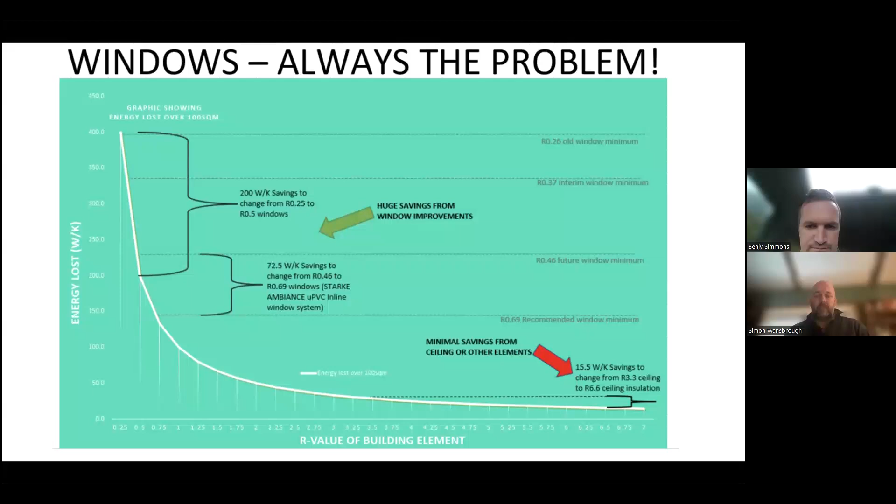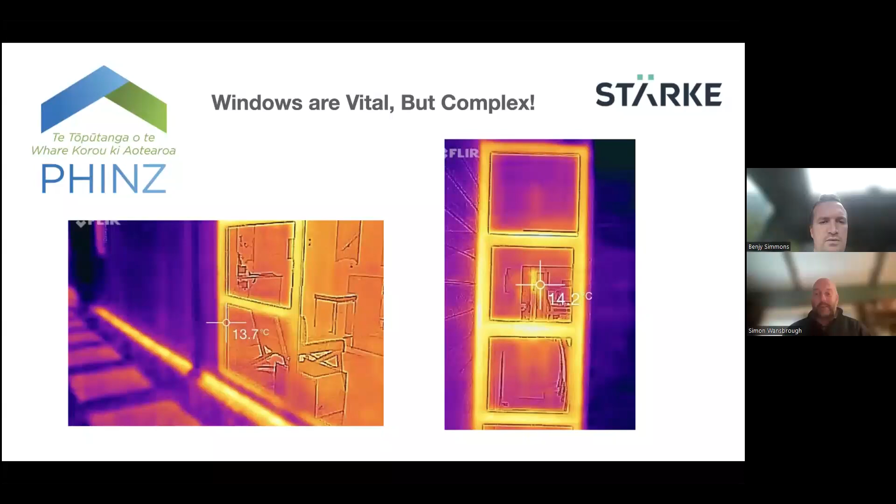And completely aside from what we're talking about, if you have a look at that left-hand photo, the bright orange line along the bottom, that's an uninsulated concrete slab. So yeah, not good. Wow.

So some of the things we're going to be talking about is how we can make windows better. So there's a few things there we're going to talk about: different types of windows, different types of glass, double glazing versus triple glazing, and also recessing the frames into the insulation.

So here, Benjy has a slide just looking at different window frame materials. Benjy? Yeah, and I've only just got smiley faces because a lot of the devil's in the detail, but globally, those three, thermal aluminium, UPVC, and engineered timber, they're the three that are generally compared. This slide used to have a cold aluminium column as well, but I figured I could delete that for this particular audience. None of this is fixed in stone.

So there we've got thermal performance. Well, thermal alley is medium, UPVC's better, engineered timber's best. That can vary depending on the exact product, but that's a rule of thumb. And certainly the cost plays a big factor too. You could buy thermally broken aluminium windows that were the best in the world that may outperform the others, but they might cost 4 or 5 times more.

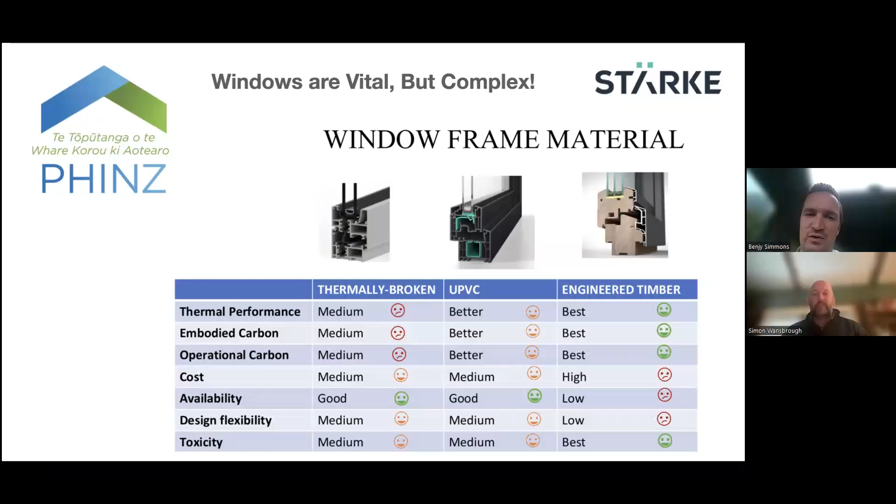I think the thing to note with the UPVC is that there's different grades, different profiles, which alters the performance. So just because it is PVC doesn't mean that it's necessarily going to perform really well. You can get some that have a lot fewer chambers or a lot more steel, and therefore they're not going to perform as well as some of the others. Aluminium's certainly in the same boat. You could buy a thermally broken system from a local Kiwi manufacturer that's incredibly low performance, or you could import one that was fantastic.

And this slide is talking to that exactly. So here on the left, you can see more of a New Zealand style thermally broken suite with a little green thermal break there that you can see. And then you can compare that on the right to something more like what Starke will do, or some other manufacturers in New Zealand. Weather Shield does a very similar one to that, and you can just see the difference there. Whereas on the right-hand side, the black section is the thermal break, so it's huge compared to the little one which is more of a New Zealand style on the left there.

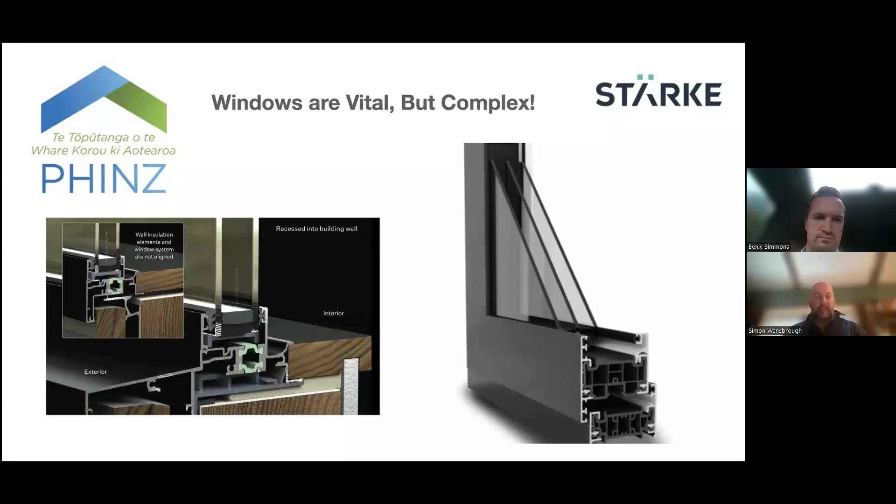Just out of interest, that left-hand photo is a photo from the APL Centrafix system, which helps to recess that thermal break in line with the insulation, which definitely does make a difference. Righto, so now we get more into how we install the windows to make sure that they perform as well as they can. So back to you, Benjy.

Yeah, it was an interesting one, and Jason touched on this in the last webinar for anyone who was there. Sorry, just before I get into that, obviously hanging the window frame out into the cavity like E2/AS1 is not going to work. You've got a huge thermal bridge there, and your insulation layers are misaligned. So to get that out of the way, we understand that the very best position is dead central on the wall, or at least central to your insulation layer.

What we found is that makes the flashings and the install quite a bit more complicated, or let's say bespoke. If the window is in the exact middle of the wall, or back 50 mil from the front face, then you get a bit of variation in that dimension. So sometimes it's back 50 mil and sometimes it's back 30 and sometimes it might be back 70, which means that all your flashings out from the window to over the claddings are all customized on site, and there's just a bit of complexity there, and that adds a bit of cost and a range of things.

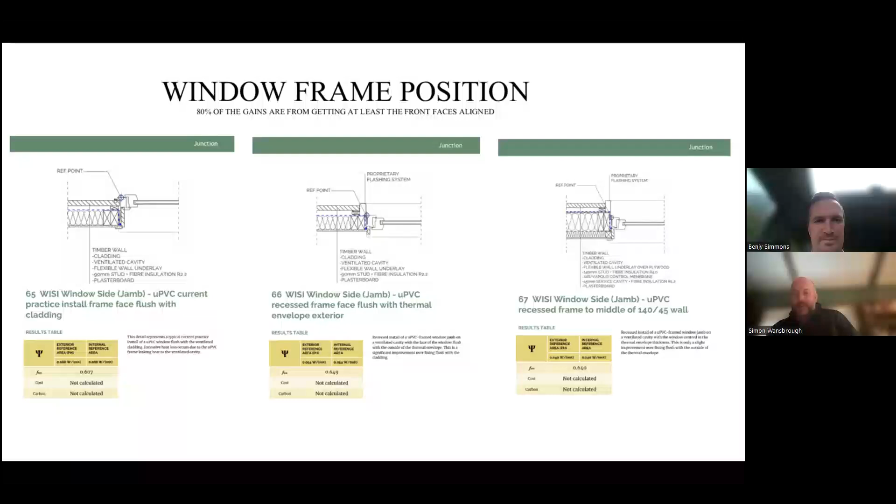I might have to say something controversial, Simon, and that'll get everyone piling in. Please do. It's the next one on air seal. Yeah. Here we go. The air seal. Should it be at the front or the back or both?

Yeah, surely there'll be some opinions on this, but obviously our default is a rear air seal. That's kind of in the code, and that gets us started. Now, what we know is that the air seal is actually the most critical element of the water tightness, because if it's airtight, then there's no air moving through the system, and when air moves through the system, it brings water with it. So as soon as it's airtight, you go a long way towards securing your water tightness as well.

So we have the air seal on the rear, and then of course a lot of people would want an air seal at the front as well, so you've got kind of two layers of air tightness, which is perfectly reasonable in a passive house situation. So then the debate normally rages around the sill at the front. So you can see our detail here has a little 5mm jog, which means that it's kind of open to air movement at the front.

The point in that is not to be open to air movement. It's not a standard drainage path, but it's for any potential water that ended up there anyhow underneath the window to be able to dry or drain out the front and ultimately get back to a dry state. Now, some people would say, no, you're better to completely seal, head, jamb and sill, front and back. Don't let any water get in there at all. But it just poses that risk: what happens if the window fails somehow and leaks down into that cavity? Then it's totally sealed and it can never dry, which is also not good.

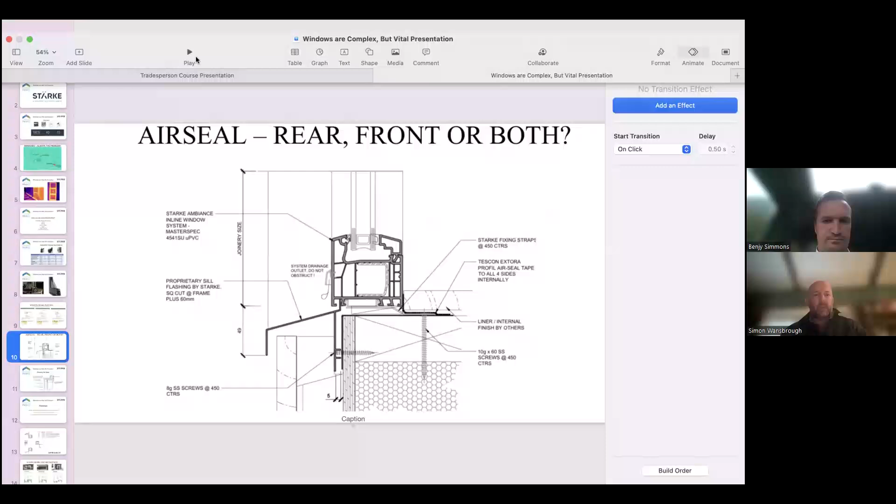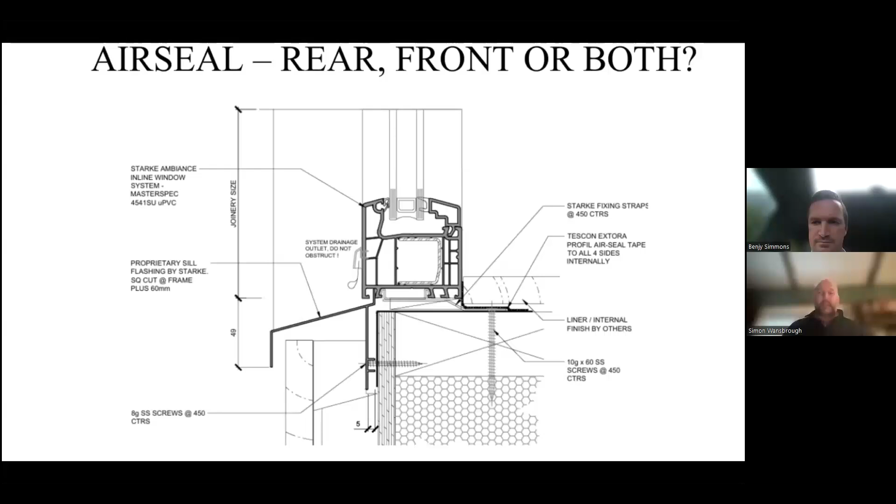I'm just trying to figure out why I can't see the chat box. I've got a little button down in the middle of the screen at the bottom that says chat. Yeah, but when I'm sharing, I can't see any of that. Oh, I see. Yeah. Anyway, but you can see it, so that's all good, Benjy. You can keep an eye on those. That'd be great. Yep.

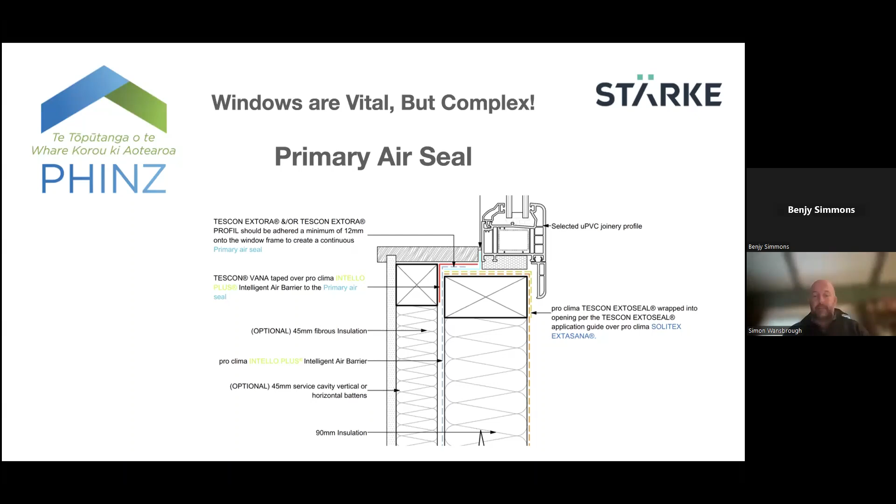Flashings. Benjy's spoken a little bit about flashings already, but we're going to talk in more detail about flashings.

Real quick, I'll just interrupt. I think my laptop battery might die, so if I drop out, I'll come back on my phone. Okay, all good. Thank you.

So flashings, especially for recessed windows, need to be carefully designed. Some designs look really good, but they're not that easy when you actually come to make them or install them. So from a builder's perspective, having a really good look at the pre-consenting stage at what those details are, and thinking about how you're actually going to do it, is very, very important.

And then obviously consider using a window manufacturer that has proprietary flashings. Funnily enough, just like Starke. But Starke's not the only one; there are other people out there doing that. It just makes the whole process a whole lot simpler if you have flashings that are specifically designed to work with the windows that you're using. As Benjy was saying, if you've got a bit of a bespoke recess, sometimes you can't get away from having to do something custom, but just really pay attention to the details before you get into it.

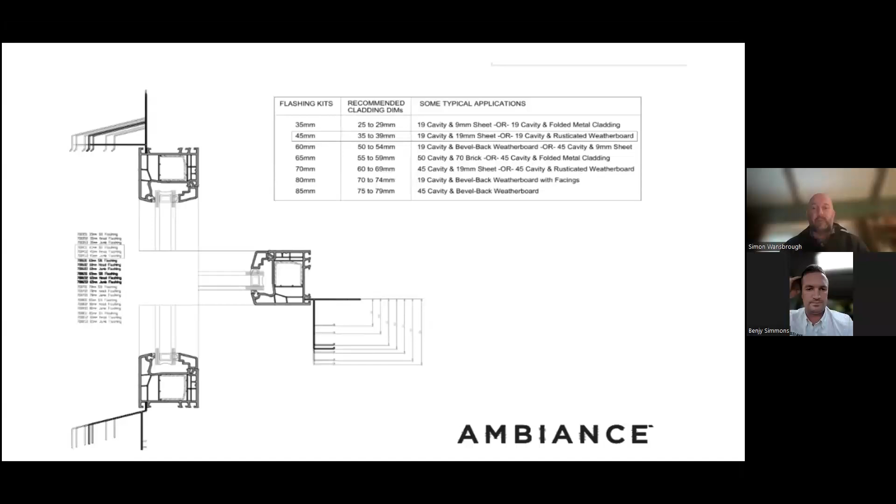I think do you have some details of that in your other? Yes, I think there are some. Yeah, that's right. So we can have a look at those later. Yeah, that'd be good. I think that external insulation is slowly starting to gain some traction, but I've seen it actually more often on non-passive houses than passive houses for some funny reason. But there we are.

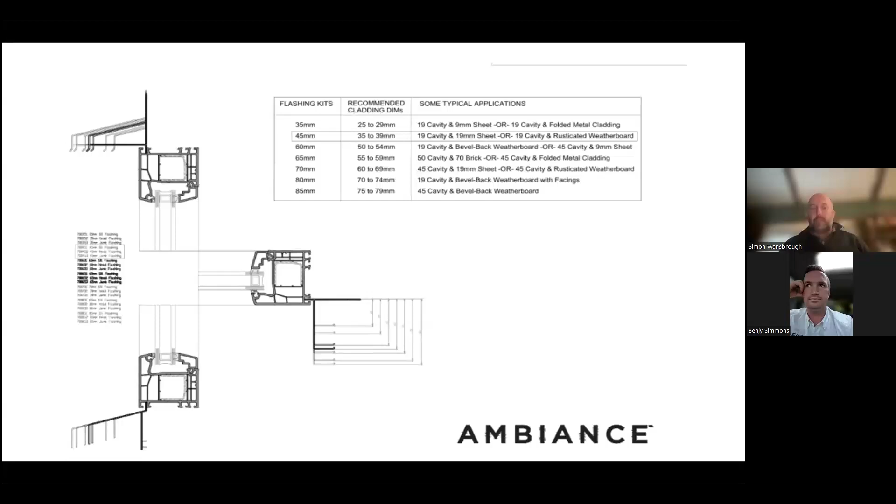Sliding doors and air tightness. So obviously, any sliding door in a passive house is a risk factor. A lot of designers, and maybe you've got a comment on it, would leave sliding doors out entirely. I think more and more though, obviously New Zealanders love a good sliding door, and more and more the technology exists to make a sliding door that actually can kick the goal.

Only sliding doors, not stackers, though, I should be at pains to point out. You can buy airtight stackers, I've heard. I've never seen one. I've never sold one. They would have to come out of Europe. The interlocker junctions are the problem. So where those panels pick up on each other, pretty tricky to make those into a properly airtight system.

So we've got 3 doors, and it's just worth kind of understanding. So the lift and slide door is kind of the traditional airtight door. If you were to import any passive house joinery, it'd be a lift and slide door that they sent. They were probably invented in the 80s, if not the 70s. So it's old tech, but it works. As designed, there is absolutely no known air leakage pathway. So if it's built perfectly, it'll be more or less perfectly airtight.

The whole market is. But I reckon because triple's still at that early stage, the price is still holding up there. And I'm afraid I probably can't say that it's going to come crashing down anytime soon. Yeah.

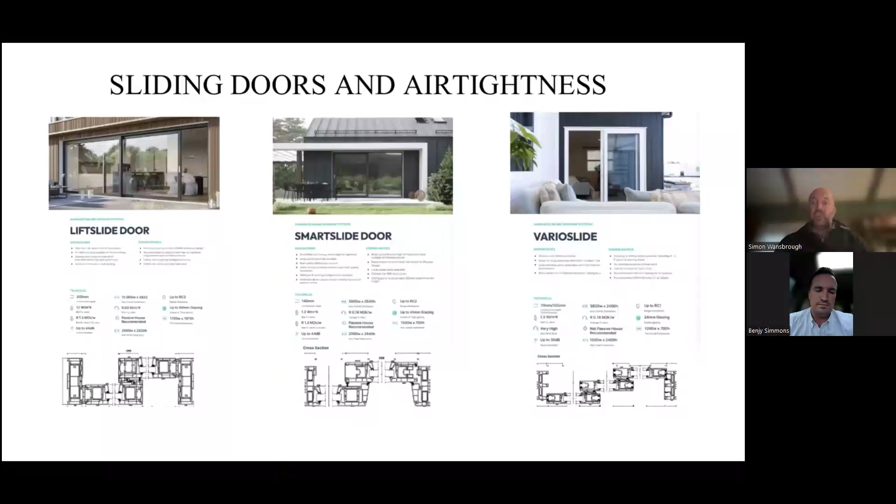But once there's a bit of competition from offshore... one thing we can do is make the frames locally and just import the triple glazing. That's another trick, and that can be cost effective, but you've still got a fair lead time and potential risk of breakages, that sort of thing. Yeah. You have done that? Yeah, we have done that. Depending on the project, I would recommend it in certain circumstances, but not every time. Yeah.

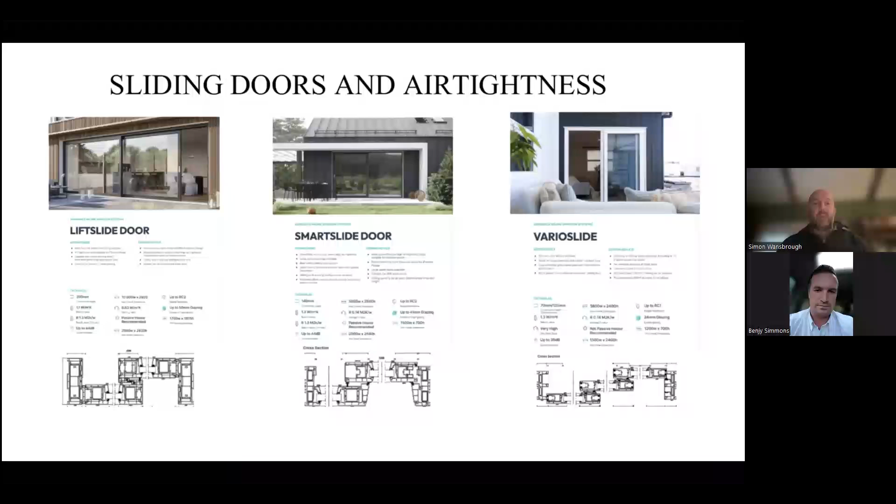Cool. Anyone got any thoughts around glass? Double glazing, triple glazing? No. We talked about that. So, just got some ideas for discussion for people to chat about and share experience. I find that I definitely learn a lot sharing ideas and thoughts with other builders and learning what other people have learned from.

Which brands of windows have you used? Have you imported windows, and how was that experience? What methods have you used for installing flashings, and the pros and cons of those? Have you had any issues getting the required performance for the right cost? What would make window choice and installation easier for builders? Because I'm sure Benjy's all about making it easier for us. Absolutely. And any other thoughts or ideas to share. So now's your chance. Jump in, have a chat, and we can see what comes up.

Can you see this chat box still, Benjy?

Yeah, Tom's just asked Glass, have you any experience of difference in quality of cleanliness between locally made IGUs and imported? Sorry, I'll clarify. Yeah, that's dust and fingerprints. So I've been involved in a couple of projects where, and it's not one particular manufacturer, it's just the difference in, I guess, the more humans and the more handling, the more risk of any kind of contamination there is. And I haven't really seen that so much with stuff coming out of Europe, where it's maybe more automated.

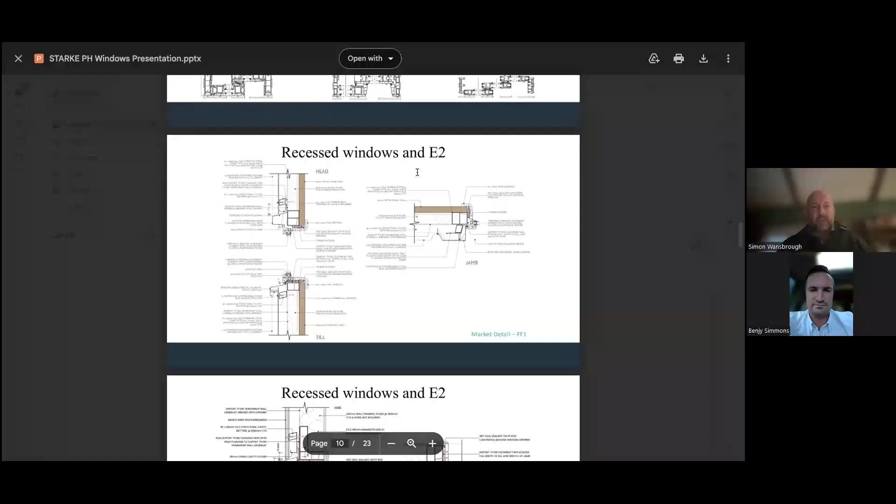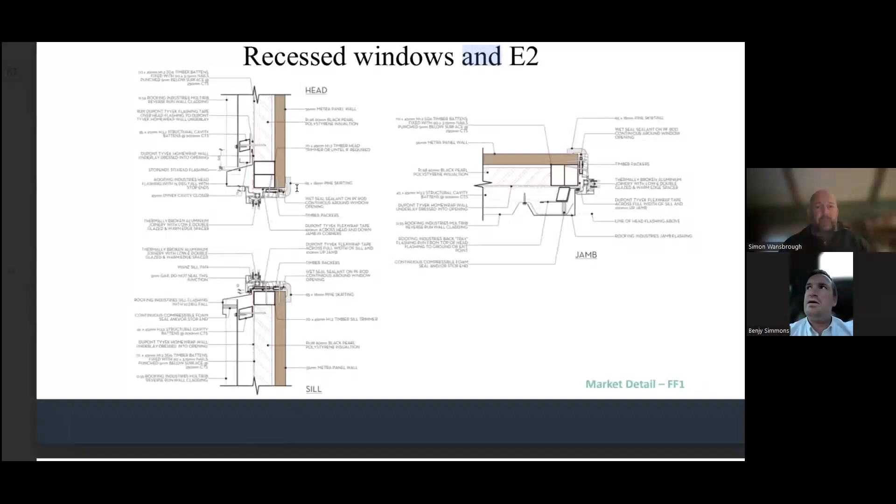Yeah, I don't have... these details were actually presented mainly to an audience that was concerned with weather tightness, not concerned with performance. But the whole industry, including the councils and whatnot, is all a wee bit apprehensive as one word, or up in arms as another word, about obviously recessing these windows because of the leaky building crisis. Everyone's pretty tentative about them all.

Just sorry, Simon, I'll chuck it in now. Now my phone's about to die, so if and when it does, that'll be the end of me. So thank you in advance.

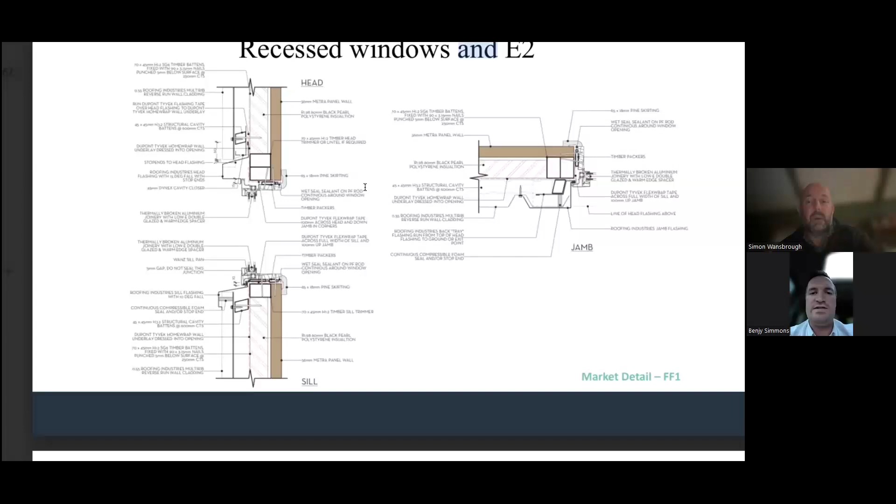But yeah, all these are a bunch of details sourced from around the industry of jobs that have been consented. And now when you look through them, some of them are really horrible from a weather tightness point of view, and some of them are not bad. But I guess the message is, if you are recessing that window, you need to do so very intelligently from a weather tightness point of view. And that's not always what's happened.

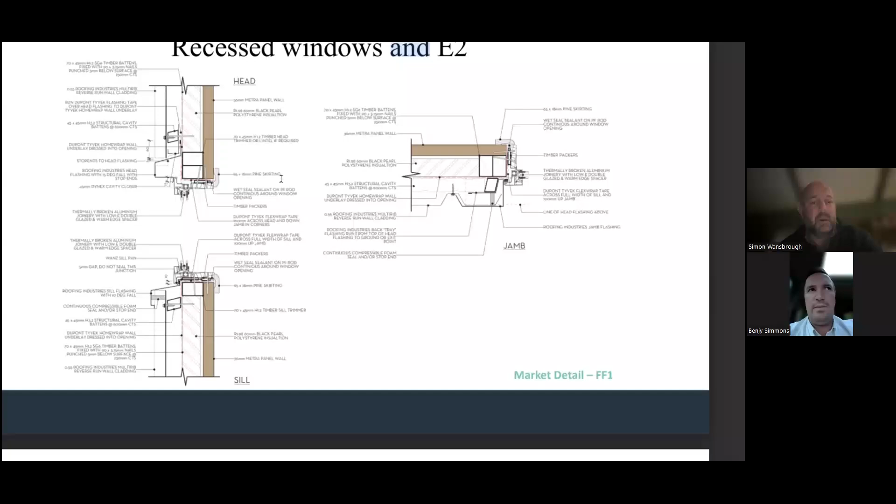So you can see here, and the worst things to watch out for is obviously an aluminium or a standard Kiwi thermally broken aluminium frame, like you can see there. And then if you just pull that back, it's exactly your experience, Simon. Pull that back into the above the framing.

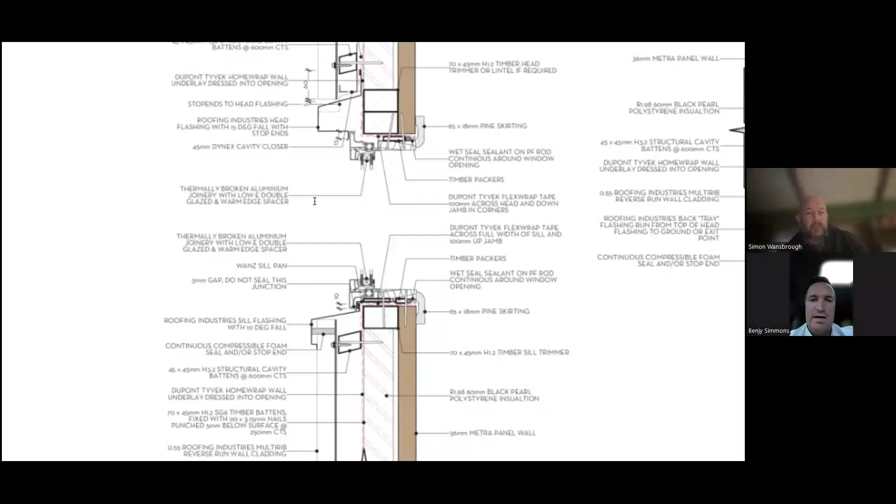I guess there's an old saying, I think someone said that there's two types of windows, ones that are leaking and ones that haven't leaked yet, something like that. But you've just got to really assume that every window is going to leak and then make a plan to handle that leakage water. So I can't quite see, but it looks like there might be an aluminium sill tray under that window. Yeah. Well, yes, there is.

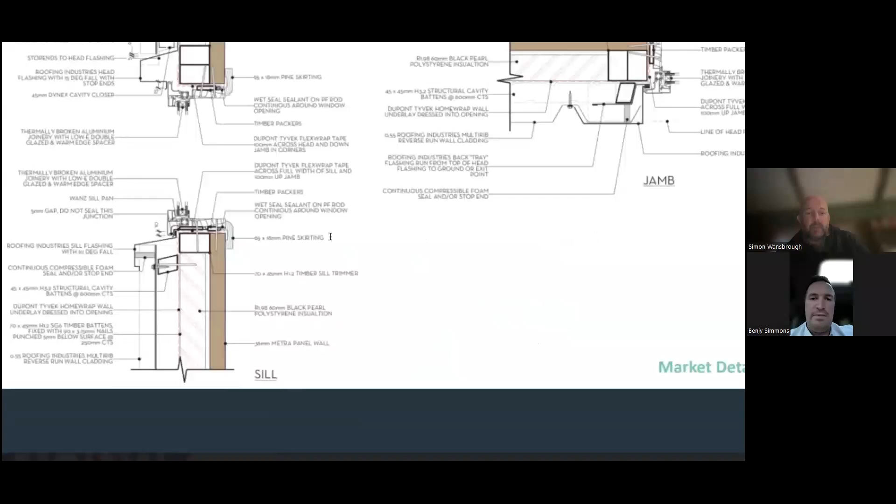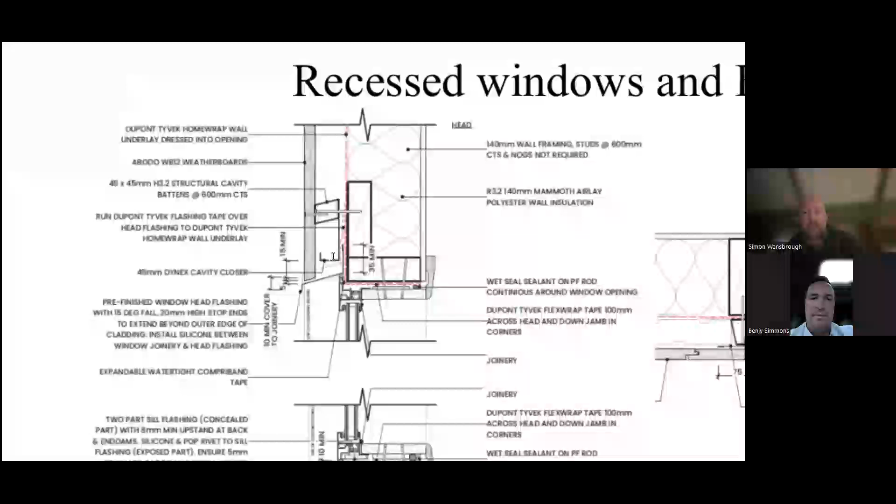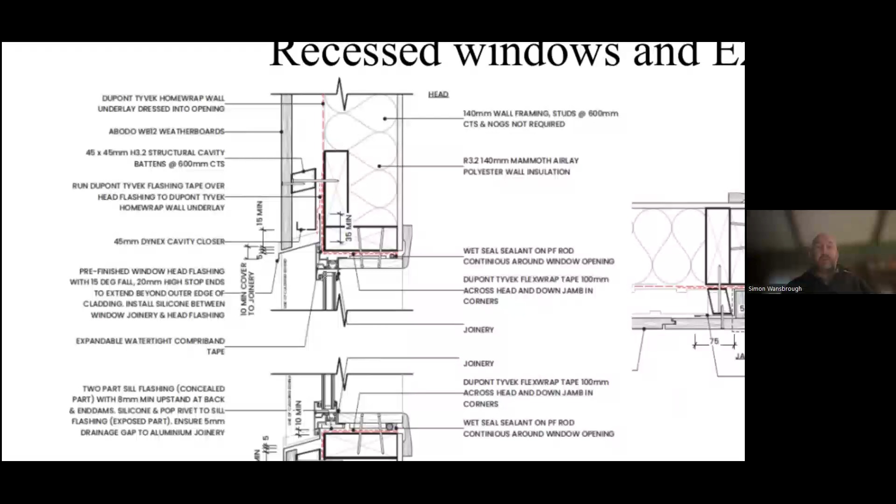Have you frozen, Benjy? I think Benjy has left the building. Yep. So luckily we got through everything we wanted to present today while Benjy was still in the world with us. Benjy is on Waiheke Island in his car about to make a presentation to some architects, which is why he was having those issues.

So sorry, Simon, I've just got a question. Just one of the details in the previous drawing. Sorry, I don't have a camera. But just in relation to fixing into the Metra panel, I saw that the window frame was fixed into the Metra panel. Is that possible? Is there any issues with that? Or is Benjy the person to answer that question?

Just let me go back, see if I can. I think it was not the previous slide, though, one before that, had the Metra panel on the inside. Yeah, so this one here. Yeah, so that's it. I just see the window, like just the window liner, it's fixed into the Metra panel. What type of board is that? To be honest, I don't know.

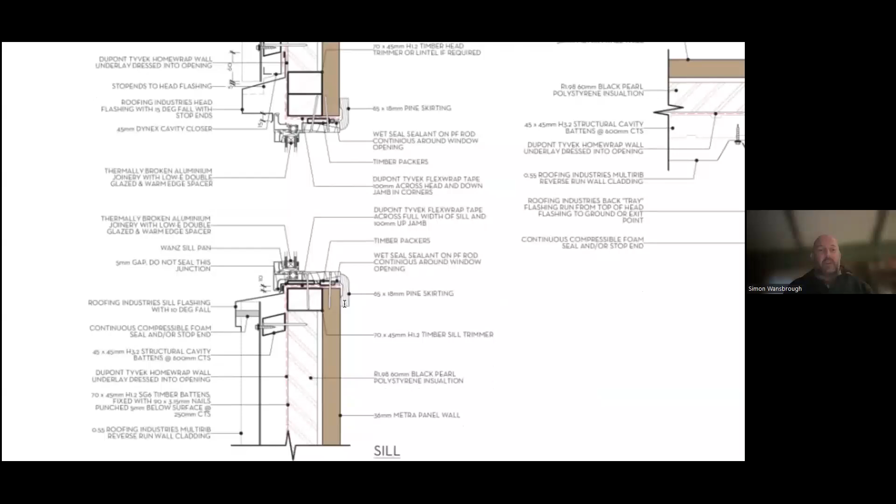And these are just a whole lot of details that Benjy rummaged up just to kind of talk about and look at what's good and what's bad. So Metra Panel is not something that I've dealt with personally. It looks like there's a timber block around the top edge of the panel that the window's attached to. But yeah, it's not something I can provide any expertise on. I'm sorry. Okay.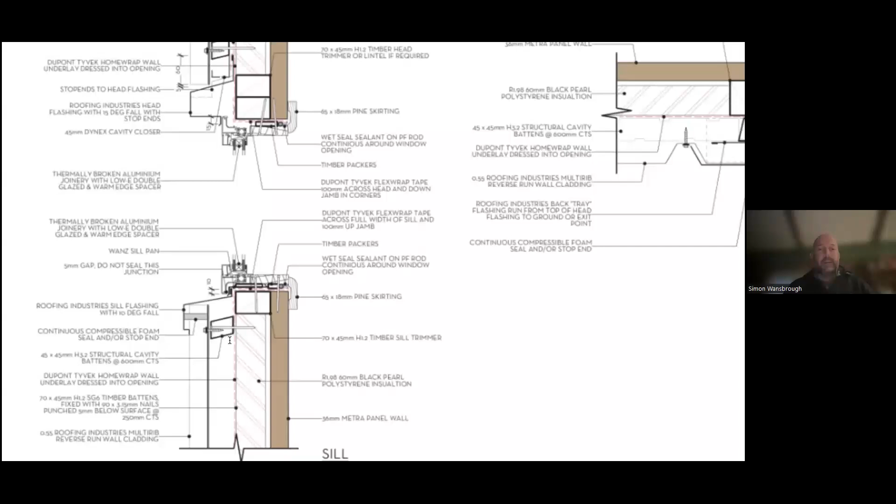So yeah, like Benji was saying, the crucial part is our sill, and making sure that we allow for any water that does get in there, even though we think it might not. I mean, personally, I used to always tape on the exterior all four sides, and now I don't. I tape the two sides and the top, and I leave the bottom open. But obviously, I'm completely taped, completely air sealed on the inside.

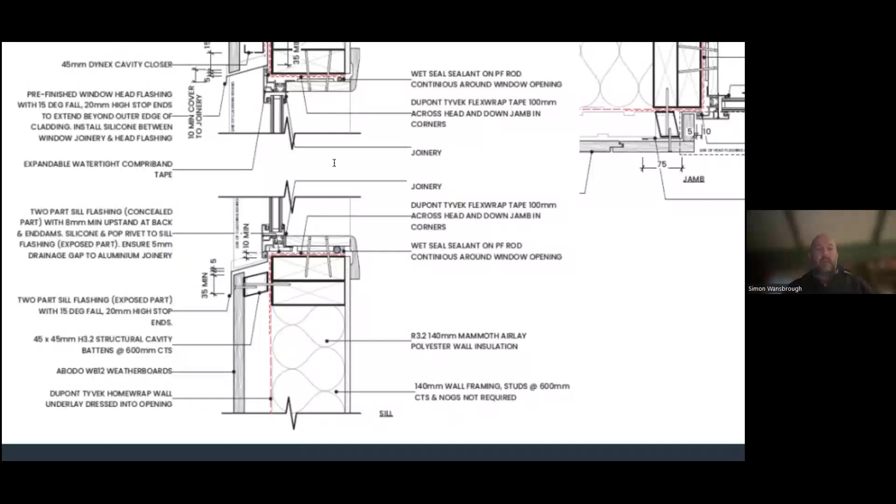So I think that we've covered what we wanted to cover today. We've still got a little bit of time, so if anyone's got any things that they would like to talk about, questions that they'd like to ask, ideas they'd like to share, then go for it. And otherwise, if not, then we will sign off.